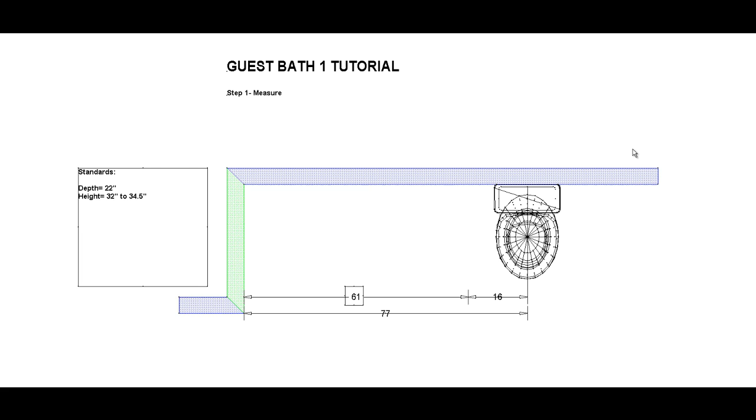Step number 2 is a pretty easy step. It's just fillers and end panels. So let's get started. In the previous step, step number 1, we measured, so we know we need exactly 61 inches of cabinets. And we also know that we've already established our standards. We know that the depth of our cabinet is going to be 22 inches deep, and the height's going to be between 32 and 34.5. Okay, that's just our cabinet sizes.

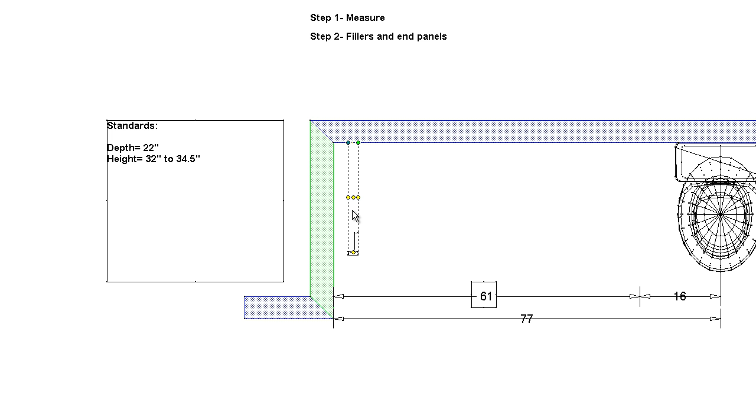Pretty simple. Alright, so let's get a filler here. Now, obviously, you can follow along in graph paper if you want. You don't have to use a computer program. I'm just using this because it's a lot cleaner. I have messy handwriting. So, all right, there we go.

So filler, basically the depth of our filler, from the back to the front, let's make that at 22. All right, so I just put that along the wall. Now, whenever you have a cabinet run that's going into a wall, you have to use fillers. Now, 2 inches is the minimum width that we offer with our fillers. I highly recommend using a 2-inch wide filler. And there's a couple reasons for that. Number one, let's take a look at 3D view here.

Whenever your cabinet run goes into a wall, these walls are almost never perfectly square. They're going to be a little wavy, or there's going to be some problems with it. The nice thing about fillers is they can eat up a lot of that inconsistency. If you run a perfectly square cabinet into a wall and there's any sort of variation in the wall, that perfectly square cabinet is now useless, because if your door opens up, you might be rubbing on part of the wall, or drawers might rub on the side of the wall.

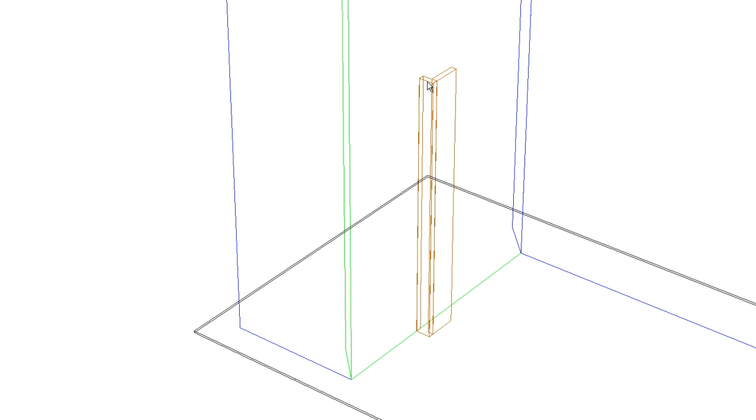So you want to space it out a little bit. Think of it as more of like a spacer. And in this case, I recommend using a 2-inch wide filler. Okay, real simple. Next thing we're going to be putting in here is a base finished end panel. There's our base finished end panel. And for this particular application, I am going to use just a slab base end panel. There's no panelizing. It's just a slab 3/4 inch thick applied end panel that would go on the end of the cabinet run.

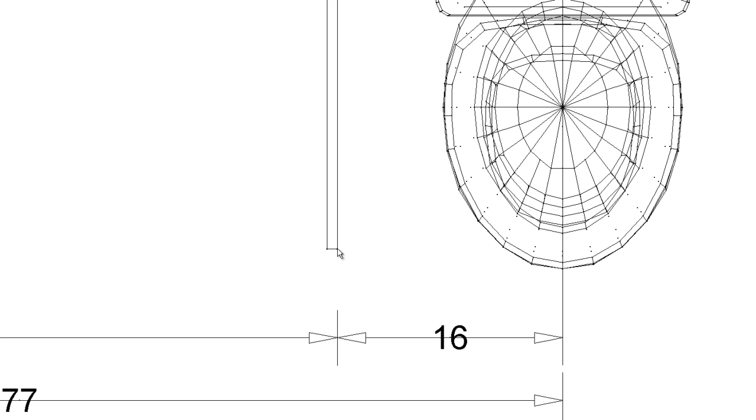Now, we want the edge of this end panel to be exactly 16 inches away from the center line of that toilet. That's just an industry standard. There's nothing really special about that. We talked about that in the last step. So I'm going to go, there we go. So now I'm exactly 16 inches from here to the center line of the toilet. It's pretty simple. As far as end panels are concerned, you can always dress them up a little bit and use a more elaborate end panel. I usually recommend keeping it real simple, but that's really up to you.

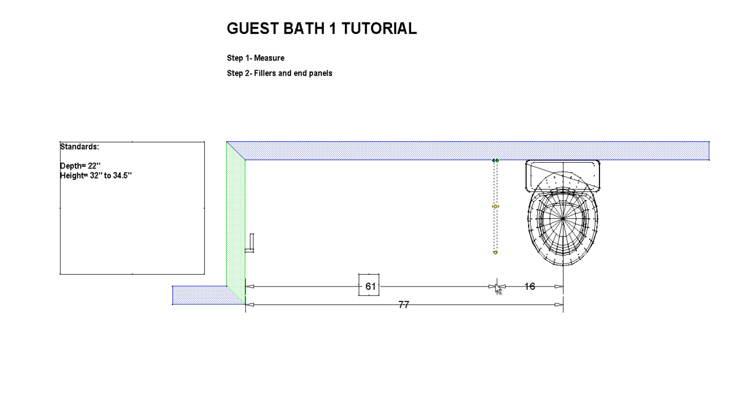To conclude what we've talked about already: we talked about our fillers, we talked about our end panels. Oh, one other thing I did want to talk about here with our end panels. I forgot to do that. Sorry about that. Depth from front to back. You're going to be looking at that when you're trying to order these things, and it's going to say 22 and 5/8. That's not right. Sorry about that. Let's redraw that.

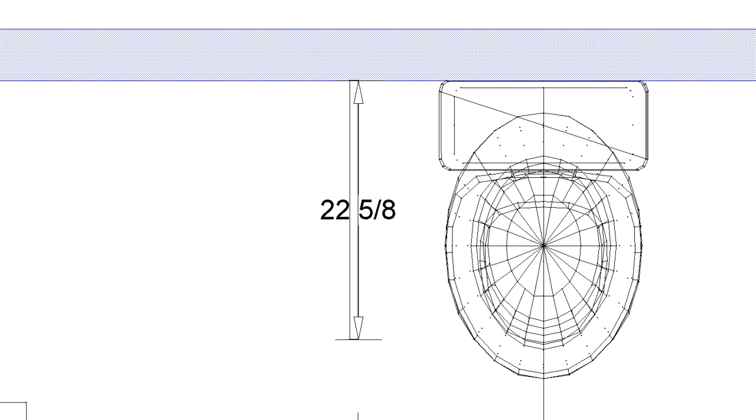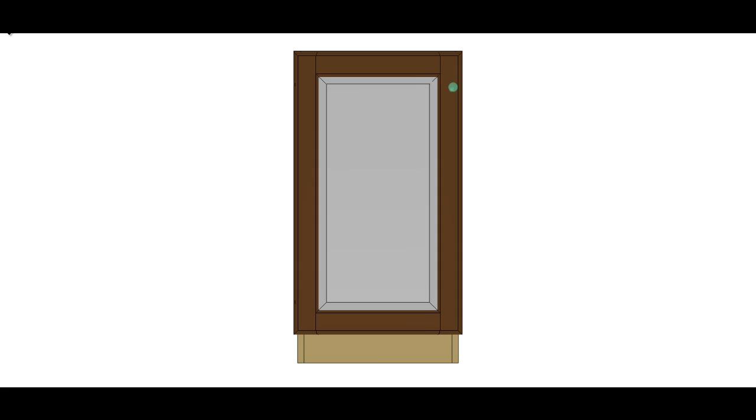The reason we give you only a few options, basically on 1-inch increments for the depth of your cabinets, and the reason we have 22 and 5/8, is for the edge of the door. So let's put a door cabinet here just to show you what's going on. And I'll delete this out before we leave. All right, there we go. Let's pull this thing over. We're going to do a little mock-up here for you. Let's make that thing 22 inches deep. And let's switch the hinge side over. There we go.

Alright, so the reason why we do a 5/8 proud is the end panel is going to be 5/8 more in depth. So since we're doing 22-inch deep cabinets, we're going to be doing a 22 and 5/8 deep end panel. And the reason for that is part of our design, so that we want it to extend by 5/8 of an inch. That way, when this door is on the cabinet, these profiles are going to line up perfectly. Now keep in mind this door does sit a little bit farther out than it actually shows here.

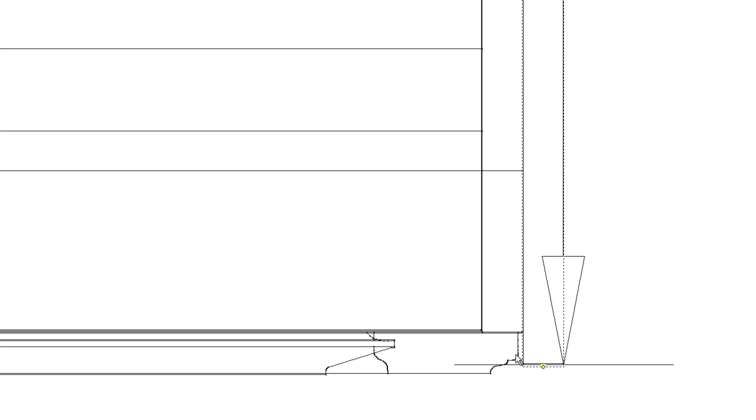So the way we've engineered these cabinets is to create a more flush look. It's going to have a better design and a better appearance pretty much all the way around. It also adds a little bit of edge protection for the doors and gives your overall cabinet appearance a cleaner look. So to conclude, you're going to want to order your end panel. In this case, let's order it at 34.5 inches tall. So that's the height, from front view. From the ground up, it's 34.5, the same as your cabinet height.

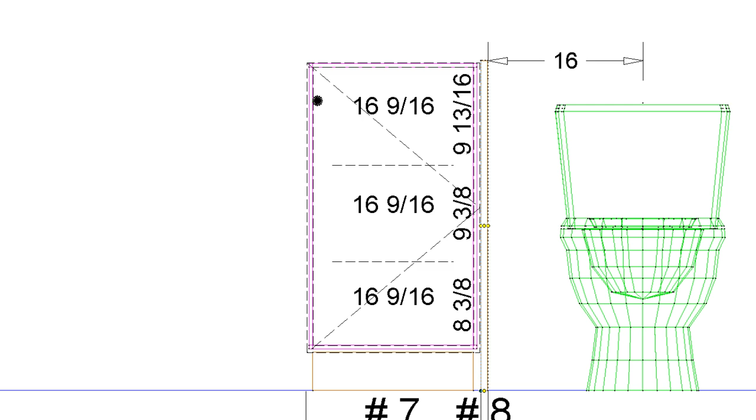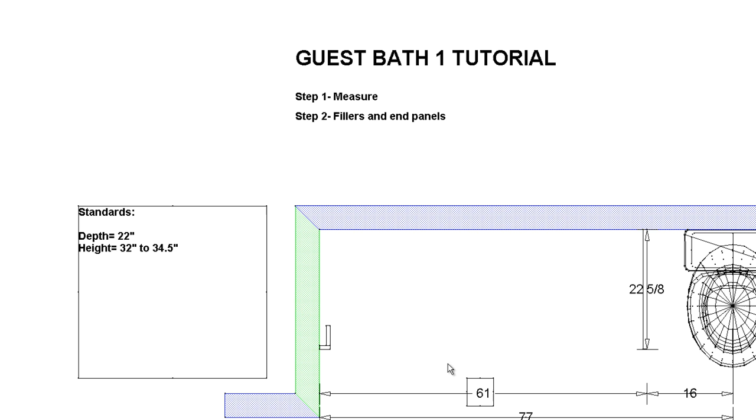The depth from back to front is going to be 22 and 5/8, and that'll protect the edge of the door and create the design that we're looking for, a little bit more of a flush design. All right. Other than that, we pretty much have it all worked out. I'm going to delete this one, and we'll move on to step number 3, and that's the other cabinet areas where we get into the sink and more of the fun stuff.